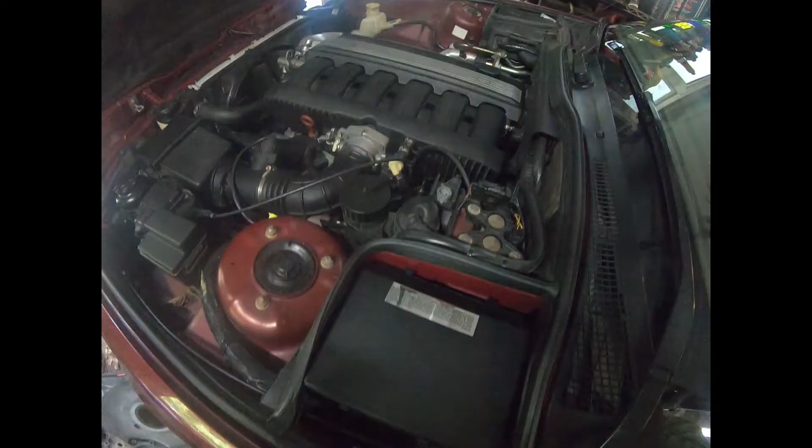All right, guys, we're out here at the E34 525i, and this water pump's been leaking for some time. And I just replaced the one in the other car the other day. That one wasn't even really leaking, and it just went kaplunk. So I thought I'd just take care of this one. So we're gonna start by just letting the fluid out of this guy.

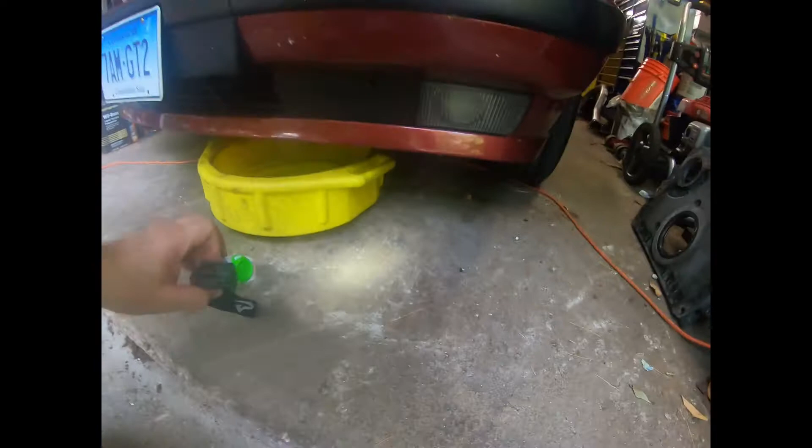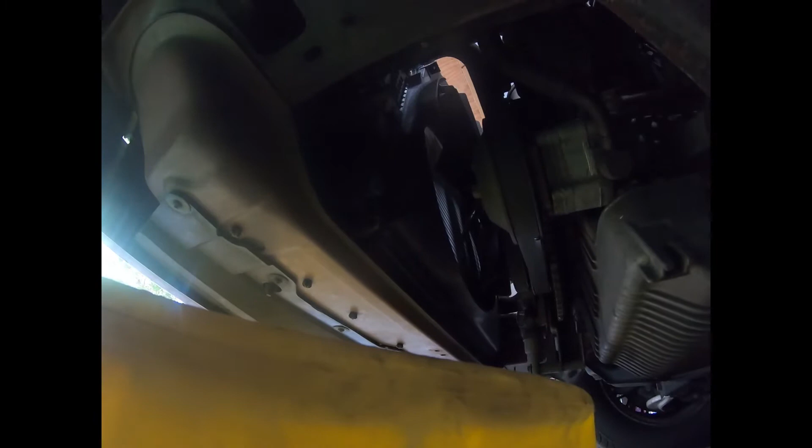And since we're replacing the water pump, we are going to replace the upper and lower radiator hose as well while we're here. I haven't done this in a while, so I think this just screws out as I remember. Oh, that's right. Now I remember. Okay, I'm gonna loosen the radiator hose now. So I remember now, because it never drips out of here. It goes all over the place. It's a mess.

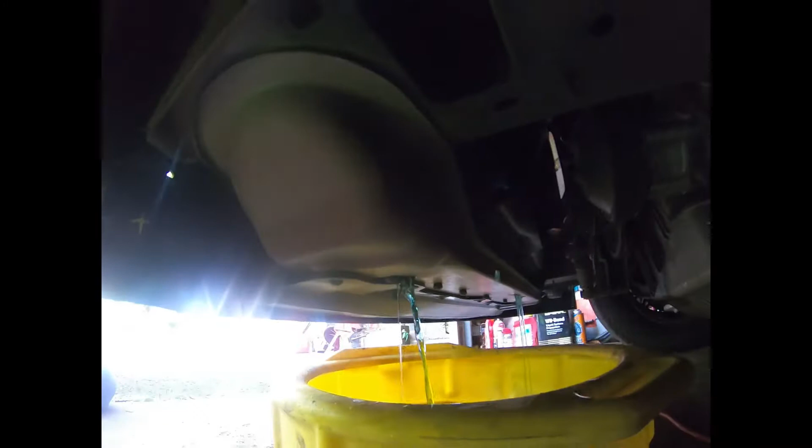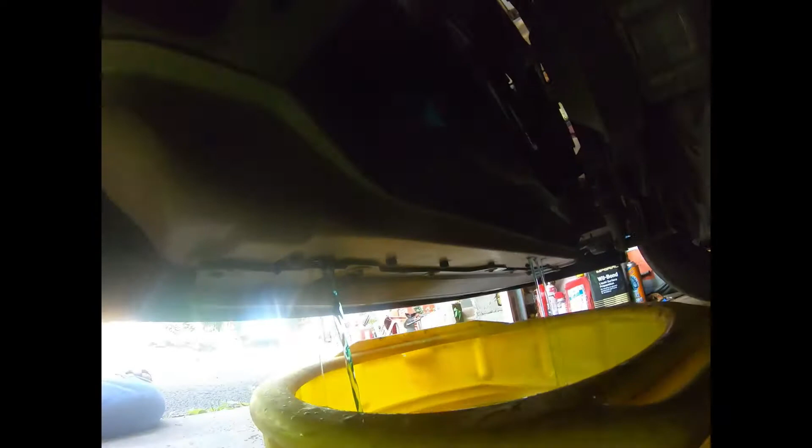Alright, so this is kind of how this goes. I remember this. I was not a fan of this. I don't know why they didn't just make that plug come out there, and then you could catch it in the pan. But we'll let this drip down, and then we'll go from there. Alright, so I just zip tie these guys on all the time. So we're just going to take these zip ties off.

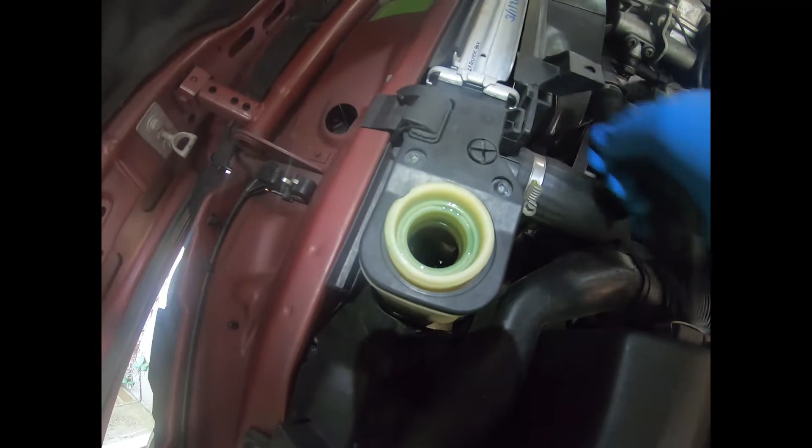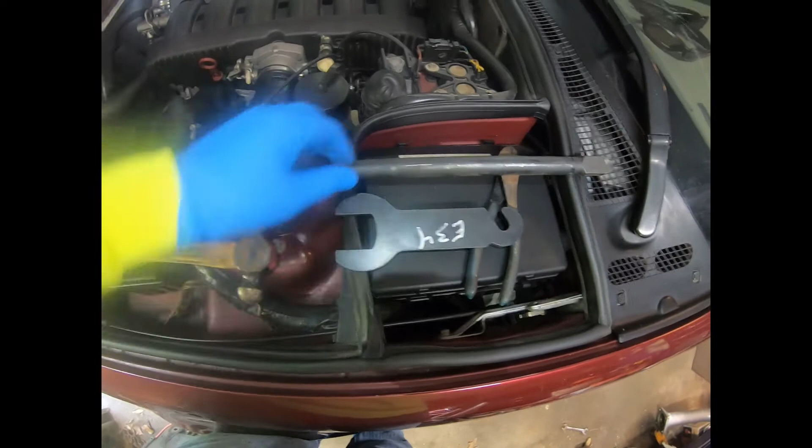And now we're going to loosen this guy and take the shroud and the fan off. So I have a set of these guys. It's got this wrench, and this is made to have an air hammer put on it. And then this guy just fits into here. There's different ones of these, and I just labeled this one E34, so I don't have to try to fit them. I just know which one goes where. So we're going to get this in here. This is reverse thread, so just pretend you're going to tighten it to take this guy off.

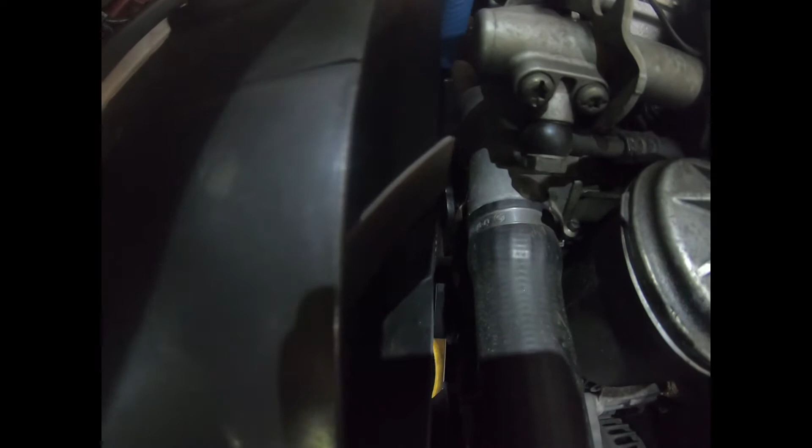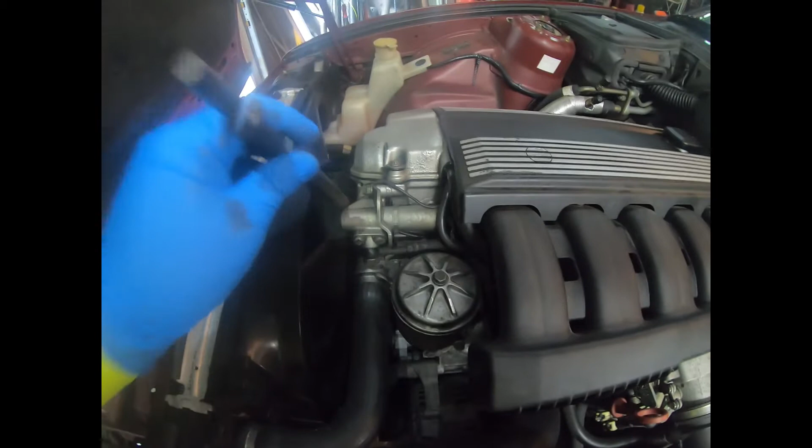So I usually just set this guy up in here the best I can, and then slide that on. And then I just hit this with a hammer. I never use an air hammer. That just seems a little excessive. Oh, except I set it up backwards. Whoops. Okay, let's try that again. So we need to go this way. Okay, so now, if it was regular thread, we'd be tightening it. So this is the way we want to go.

So then I just give this guy a tap. Usually that does it. And I'm probably going to drop my wrench in the bucket down there. Let's see if I can grab that. All right, and I try not to keep tools around here that I've used, just in case the hood shuts for some reason. I don't want to damage the hood, so I just put these aside. All right, now we just spin this guy off. You can see that it's loosening down there at the base. It's almost there. One more. All right, now we can just pull this guy out. So I just pulled this guy out and the shroud out at the same time.

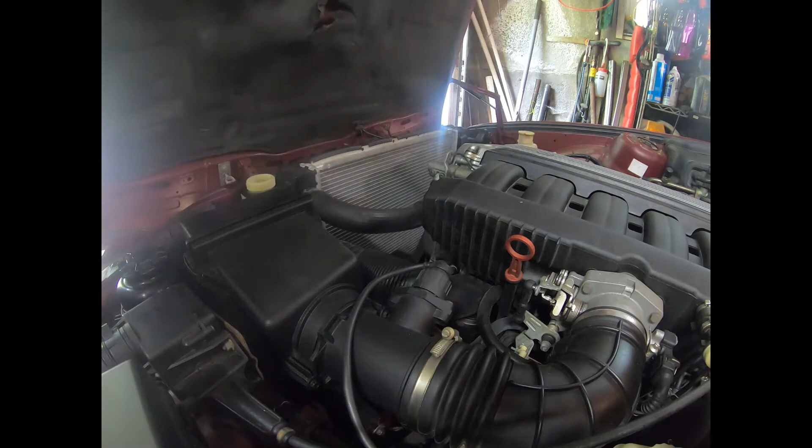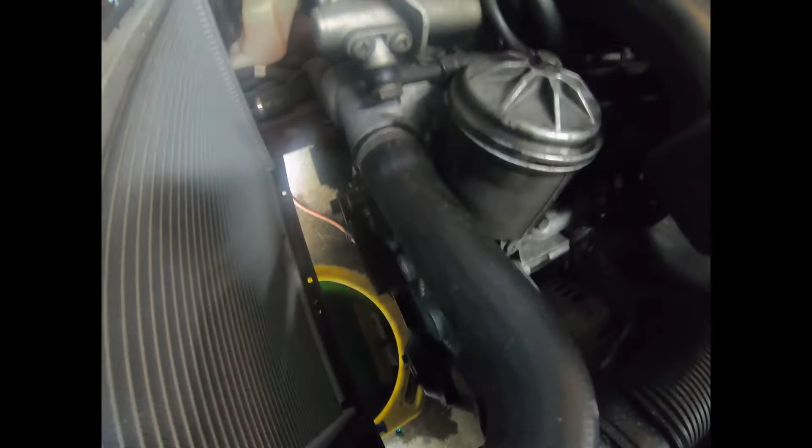So I was just looking at this, and this says I replaced the water pump in 2021 at 84,000. That's only 16,000 miles ago. But I definitely have a leak out here somewhere. I'm not sure where it is though, because I find it hard to believe that the water pump failed that quickly. So I'm definitely replacing these hoses. I'm going to take these off, and maybe they'll give us some room to look around.

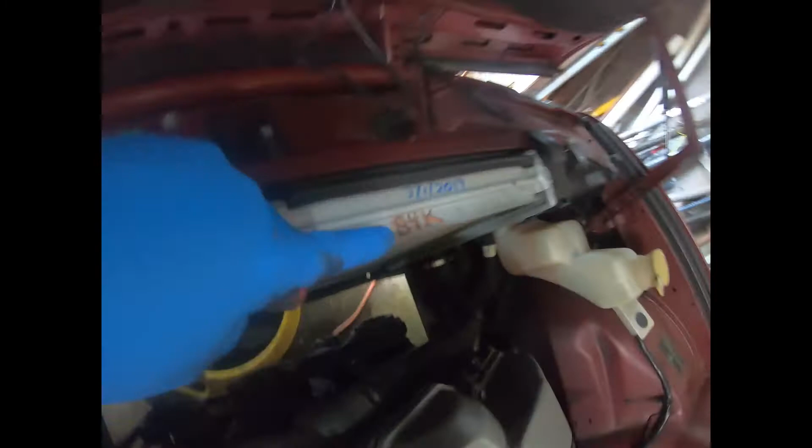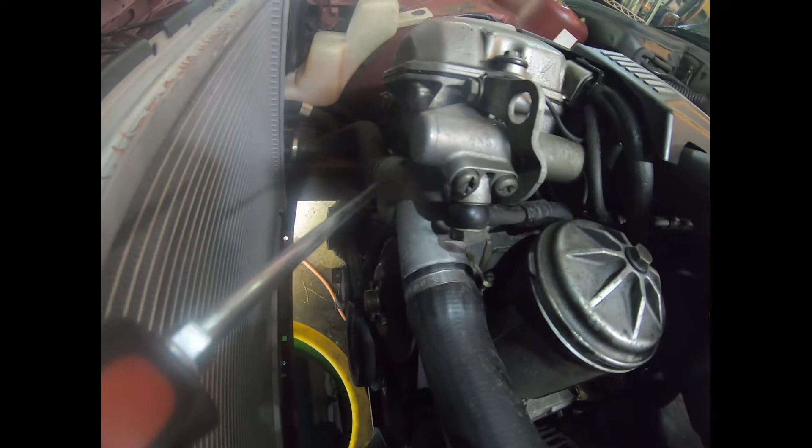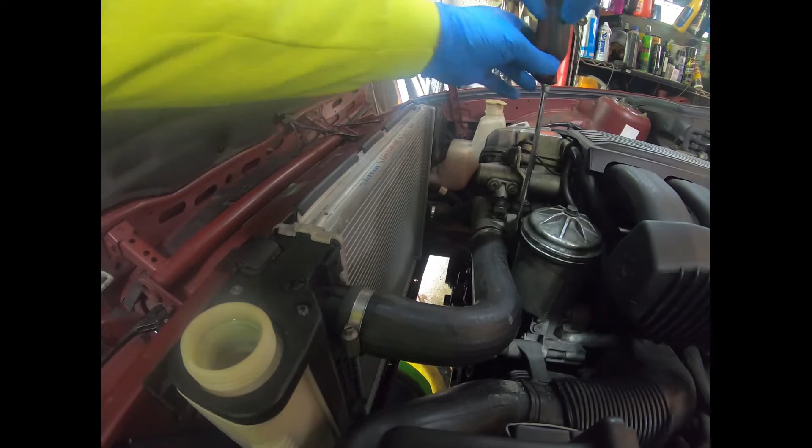I know it's only got 90,000 on it, so that's only 6,000 miles. So no, I definitely don't think it's the water pump, but it might be. I'm thinking it might be the gasket on the housing for the thermostat right here. So anyways, I'm gonna get these hoses off because we're going to replace these anyways, and then we'll see what we can see from there. It should be pretty empty in here, I think. Yeah. This one's a little crankier than that one was. Here we go.

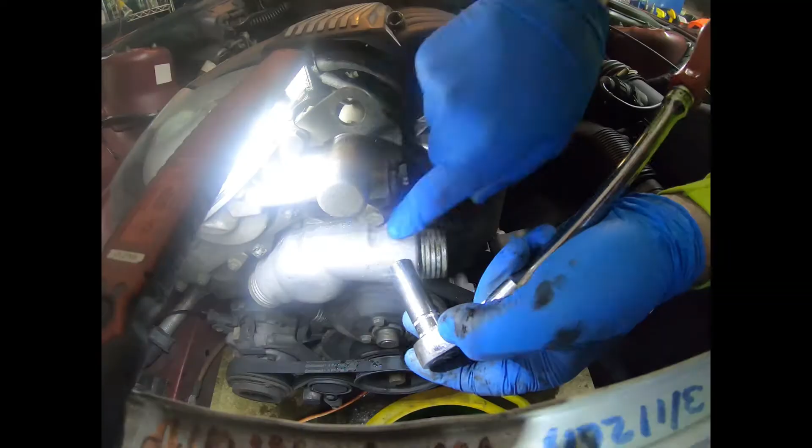Still don't see. Oh, I can see some residue. See, there's residue right there. So is that leaking from up here and coming down, or is that squirting out of there? I think we're just gonna go ahead and take this thermostat housing off. I bought another one. This one looks fine, but we'll just replace that and have a new gasket and stuff. We'll just go from there. All right, so we just have this guy right here. I think there's four bolts.

All right, so I went for the low-lying fruit first. Those are the easy ones. Oh, this one's really accessible here too.

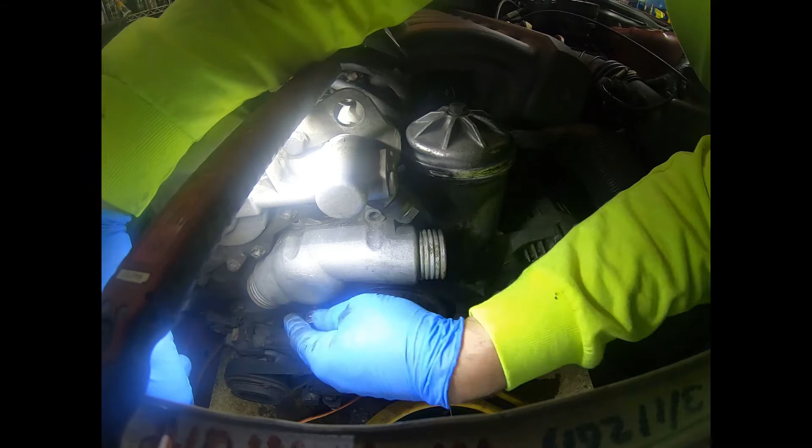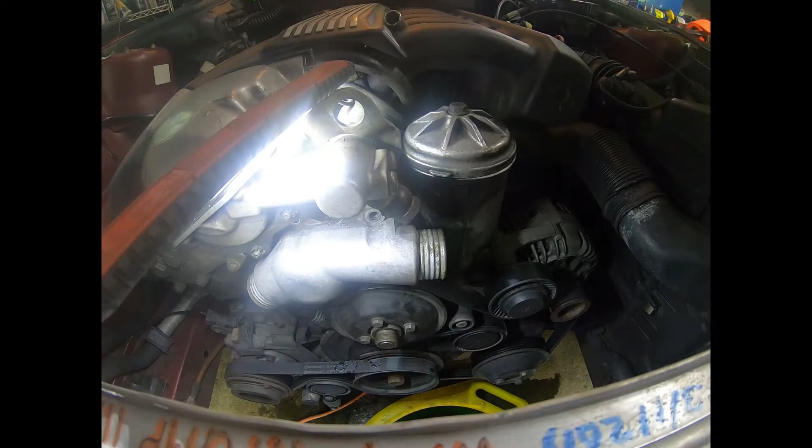Yeah, this has been a long process, because I had a fairly new radiator in it and it was leaking, so I replaced the radiator. The water pump wasn't that old at that time, and then it was still leaking, and sometime later I replaced the water pump on it, and it was still leaking. So here we are at the thermostat housing. If this isn't it, I don't know what's going on.

So I did have, obviously, the valve cover gasket leaking. That's why the front of this is such a mess, but I replaced all the lifters in this. It doesn't look like fresh oil, so hopefully that's been taken care of.

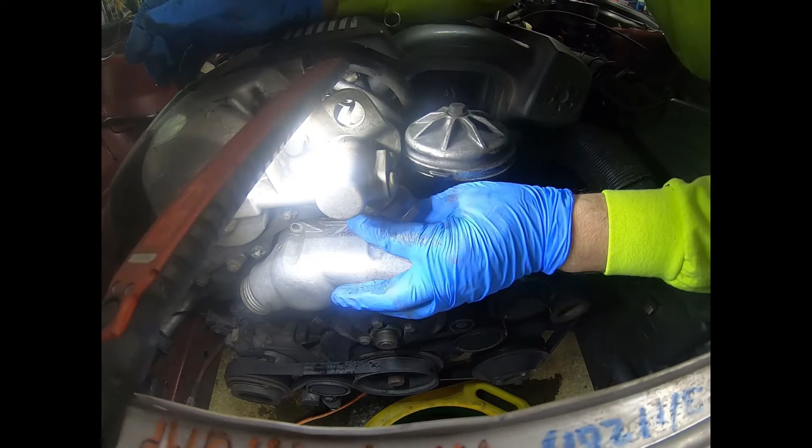Alright, maybe this will just pop right off. I may have to give it a little tap. Oh, it comes right off. Oh, whoops, I need to take this bracket off. Alright, I'll get this lift bracket off, which I'm not crazy about because it holds the Vanos on. I don't want it to start leaking from the Vanos gasket.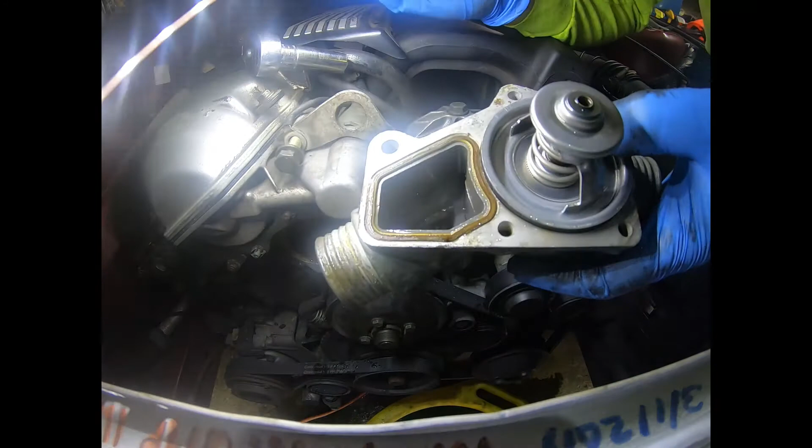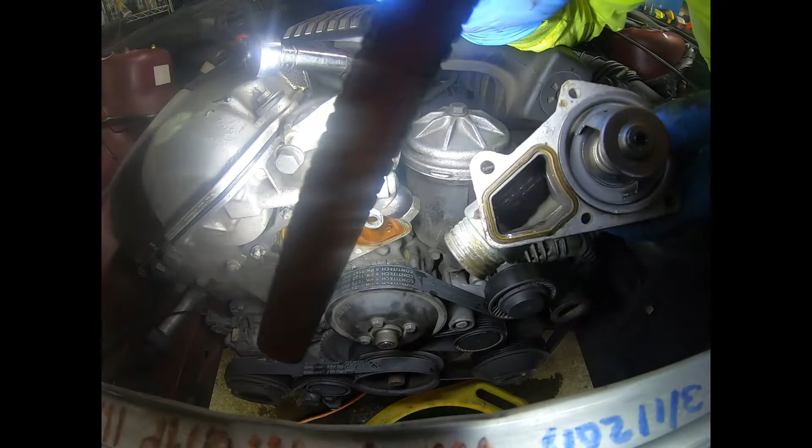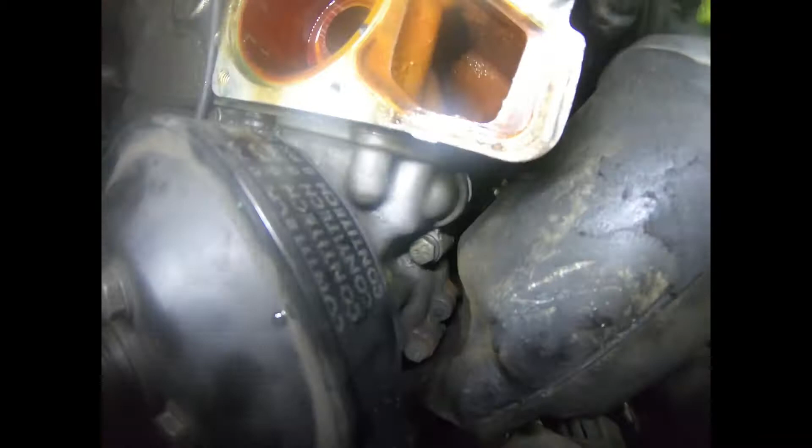All right. Well, there's the gasket. It doesn't look like the healthiest gasket. Yeah, I'm gonna guess that's where it was leaking from. Let's get a closer look in here. It wouldn't surprise me if it was leaking, especially right down here, or even down in the bottom right here. I'm gonna go with, yeah, that was leaking.

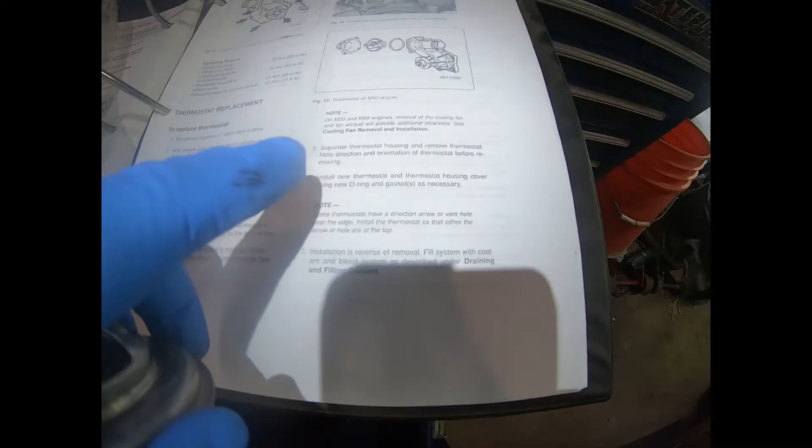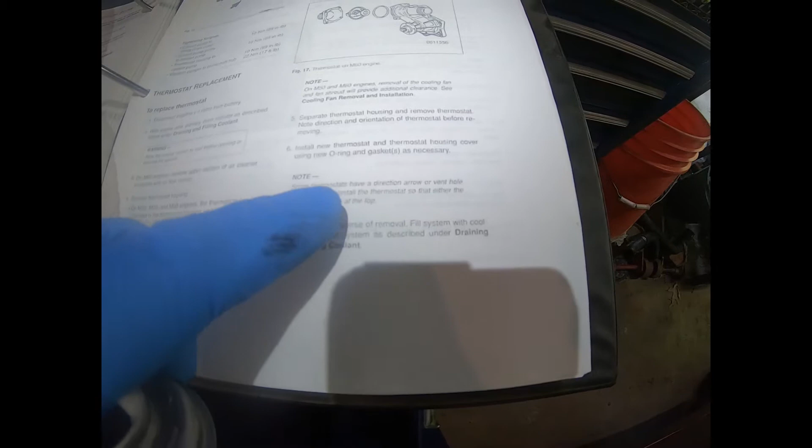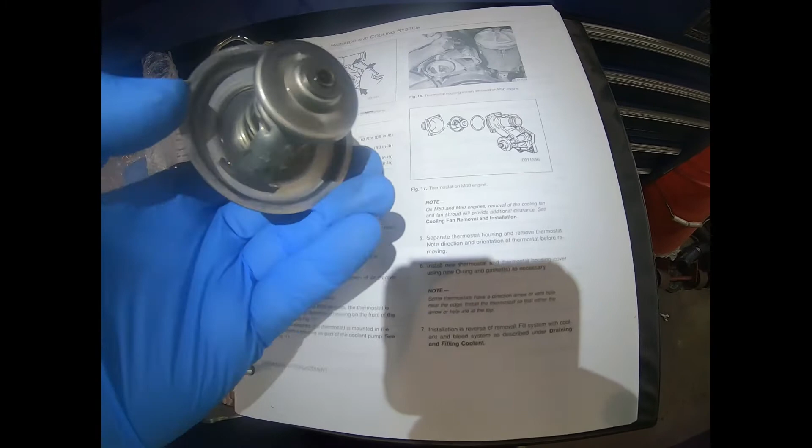Which I didn't realize, but it says some thermostats have a directional arrow or vent hole near the edge. Install the thermostat so that either the arrow or the hole is at the top. I don't see that on this one, so we're just going to orient it like it is in this picture right here, because I didn't take note of it when I took it apart. So we're just going to put it in like that.

Some thermostats have a directional arrow or vent hole near the edge. I don't see a vent hole or directional arrow. So yeah, we're going to put this in like this with the gasket on the outside.

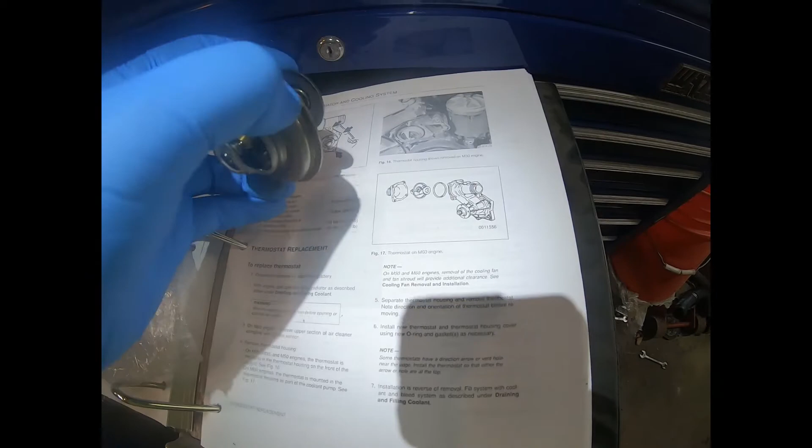All right, well, I had a new thermostat on hand. Here's the new one. Here's the old one. And I don't know why, but I don't like the way this one looks. And this one looks like a way sturdier design. Even though this is new, I think I might put the old one back in. That might be a poor choice, but I think that's where I'm at.

All right, so I'm just gonna take one of these pads and clean this up in here. All right, so the Scotch-Brite pad wasn't tough enough, so I had to go in there with a razor, and then I went back and cleaned up again with a Scotch-Brite pad.

So we're gonna put this in like this, so that the gasket's on the outside, like it seems like it should be. There's a nice little pocket for the... Oh, you gotta be kidding me. Oh, that was almost really bad. I almost just dropped this whole thing in there. This is my favorite light. All right, let's try that again.

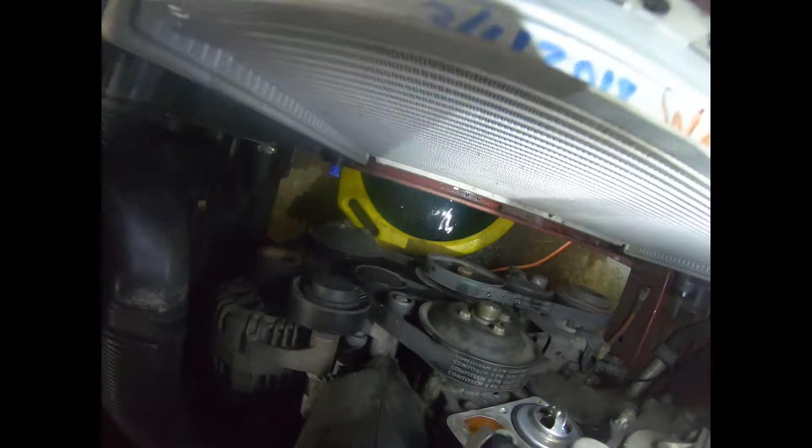All right, so back here. So now, yeah, this has a nice little pocket to fit in here. And so I'm gonna orient this up like this. There wasn't any vent hole or arrow like they said, so I'm just going with that. It goes like that. And then we've got, where did I put that? Oh yeah.

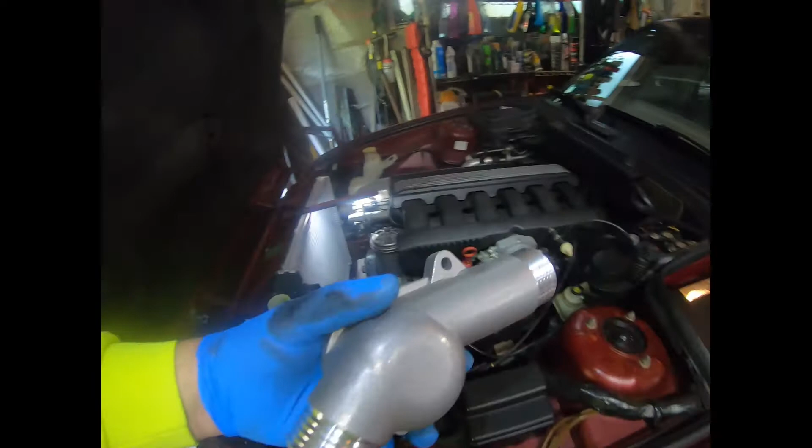Got our new thermostat housing that will pop up there. This is pretty self-explanatory after this, I think. So apparently not. I just tried to put it on upside down. So yeah, we'll just pop this up here. Ooh, I almost dropped the thermostat. I always try to be real careful with the thermostat because it seems like a pretty important piece. You don't want to mess it up.

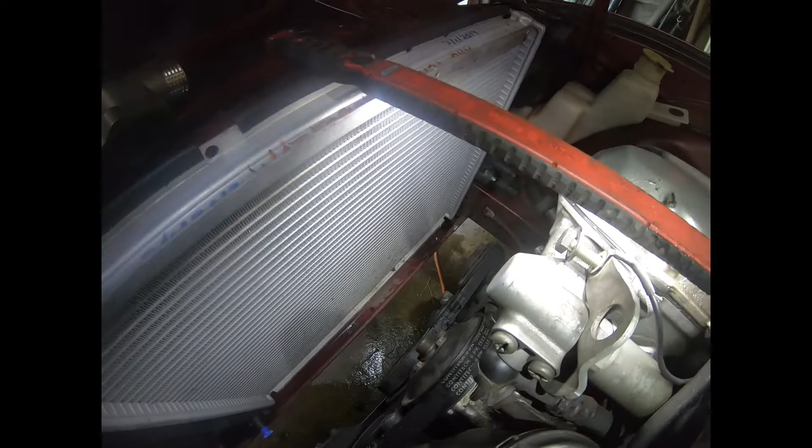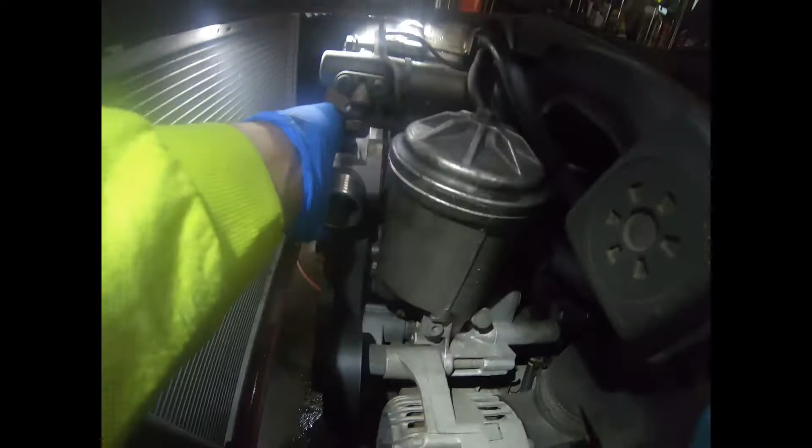When we put this in, we need to make sure we get it behind the lifting bracket. So that's kind of why I dropped the thermostat. So I'm gonna just put this guy right here. What's going on here? I lost my light again. All right, good thing I moved that pan. All right, we're just gonna take the lifting bracket out for a second, and it'll be easier to get this up here.

All right. We'll get one of the small ones in and put the lifting bracket back in. Let's get started right here. Wow, that's really hard to do without a socket. Okay, we'll try one of the bottom ones.

Okay, this is just sitting here. I'll go grab that socket. Okay, we'll just get this guy in. No, we got a socket we can get in there.

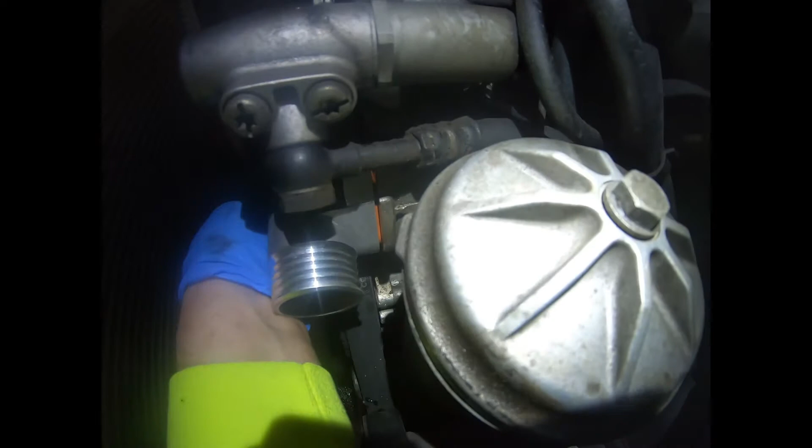So let's tighten these other ones up. Then we'll get the lifting bracket back in. So you can see, like over here, look at how that's gonna get a nice good seal in there. That gasket's got some room to compress. So get this tightened back up. Get this last guy tightened up in there.

Yeah, I always wear a headlamp when I do stuff like this. So then the light always points in the right direction. And I obviously use another light too.

I always mix this up. Now which one? I always mix up which is the short one and the long one. So, why didn't I pay attention to that? The lifting bracket has a short bolt and a long bolt, and I always mix up which one goes where. It makes me crazy every time I forget.

How is that possible? Okay, I think the long one goes up top, I think. Let's make sure about that. Okay, I'm pretty sure the long one goes up top. Yeah, it's definitely the long one. Long one definitely goes up top.

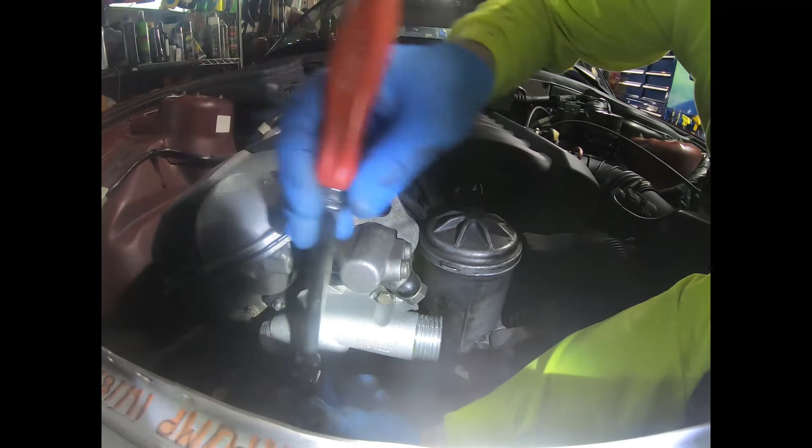All right, when I nudge these down, I want to do it a little at a time so that it gets nudged down evenly, so I can feel a little there, and then I'll move on to the next one. Then I'll just go back, so I can already feel some there. Lifting bracket.

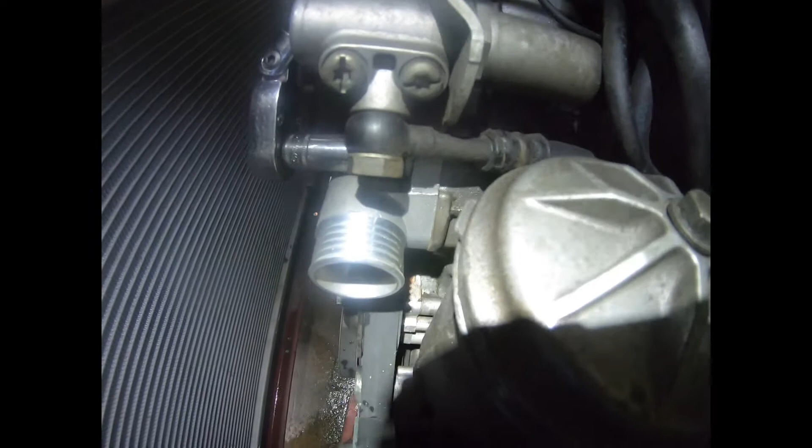Okay. So you can see that gasket we saw got sucked in, so it's making some good contact now. And we'll go around and nudge everything down a little more. Okay.

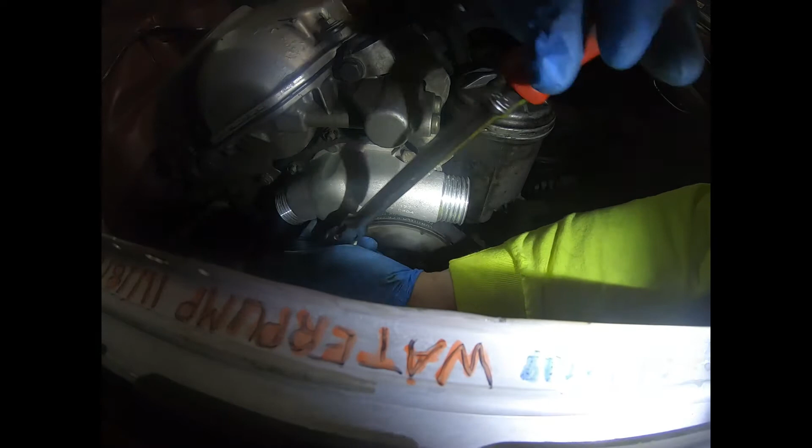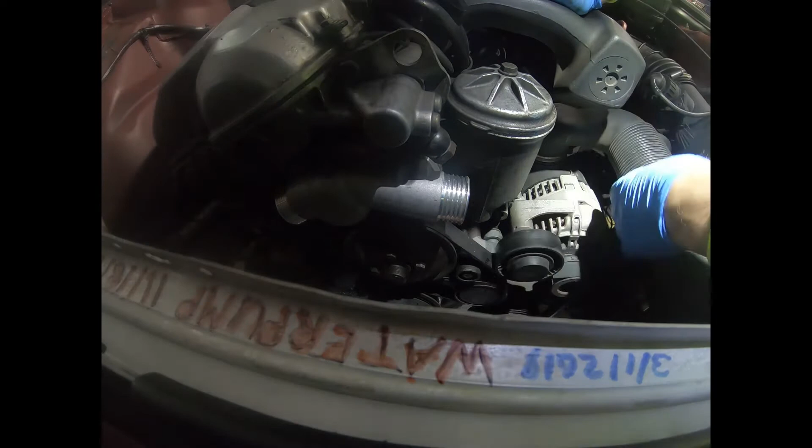All right, well, unfortunately I forgot. I just went and checked my parts that I had inside, and apparently I don't have the upper radiator hose, so I'm just gonna put the lower one in for now, put the old upper one back in, and I'll come back, partially drain the system and put this guy in.

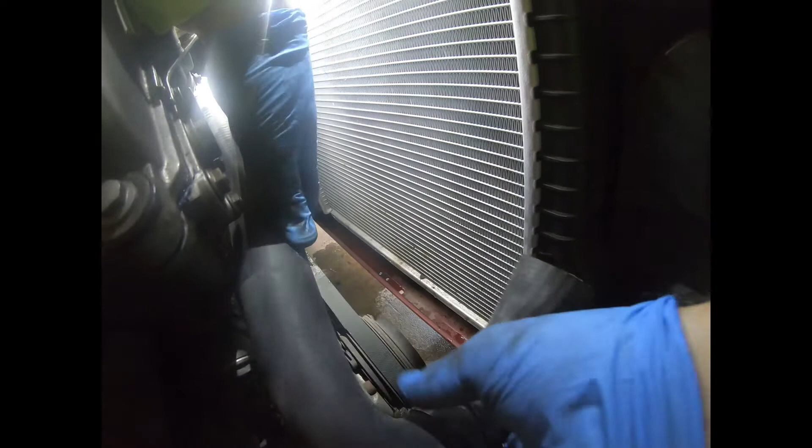All right, here we go. Just slide this guy on there, and when I take the hose clamps off, I try to just hold them in the same spot and then put them right back on the new hose, so then they're oriented, you know, where the screwdriver gets them. It's oriented in the right direction. You don't have to figure it out all over again.

All right, well, that was really cooperative. These hoses were thicker for some reason, so I had to really open up the clamps. And you don't have to kill these things either, just get them on there good.

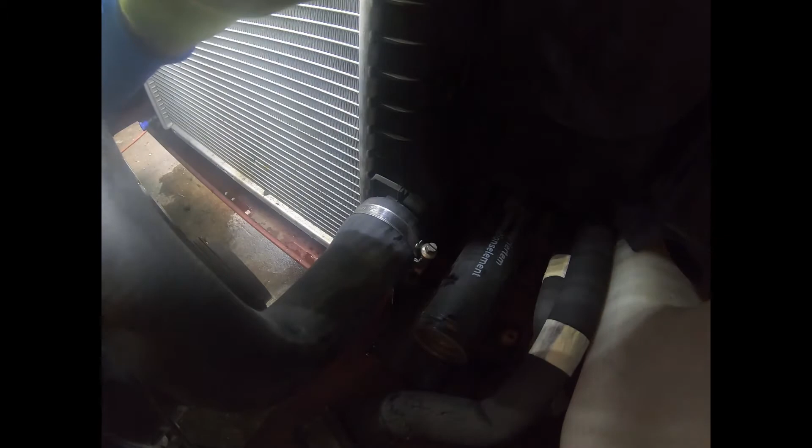So then I'm gonna try to, I think there's room on this top side with the fan and stuff, so I'm gonna orient this way, so next time if I have to take this apart, it's easy to take apart. Seems like it's sticking out, but I don't even think it's gonna be close.

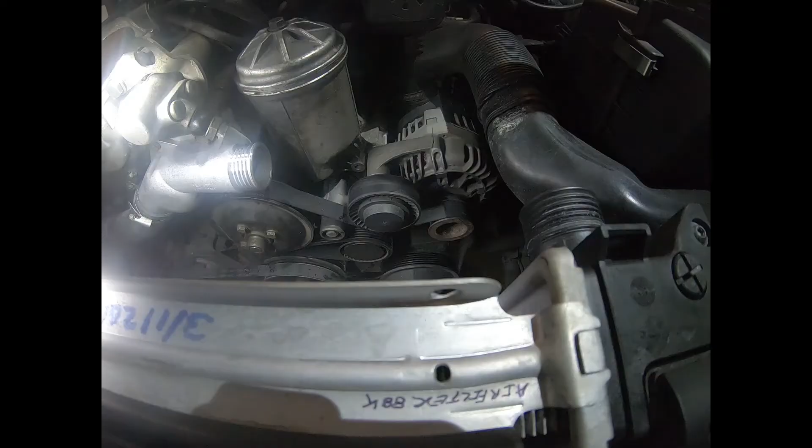All right, that feels good. So the same thing, I left these clamps on here so they're oriented in the right direction. I never took them off the hose.

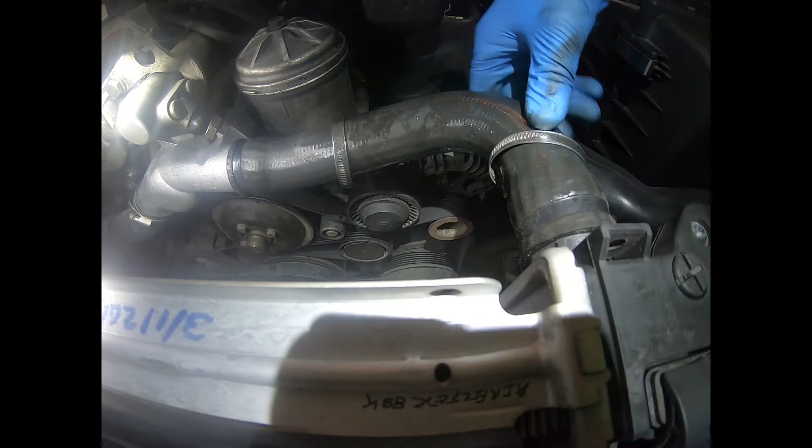So I already ordered a new hose. I like to have these around. And so I had to order a new set because I just did the water pump on the other car. And so then I just thought I'd do this one too, but obviously that wasn't a problem. So after I get them next week, then I'll replace this upper one again.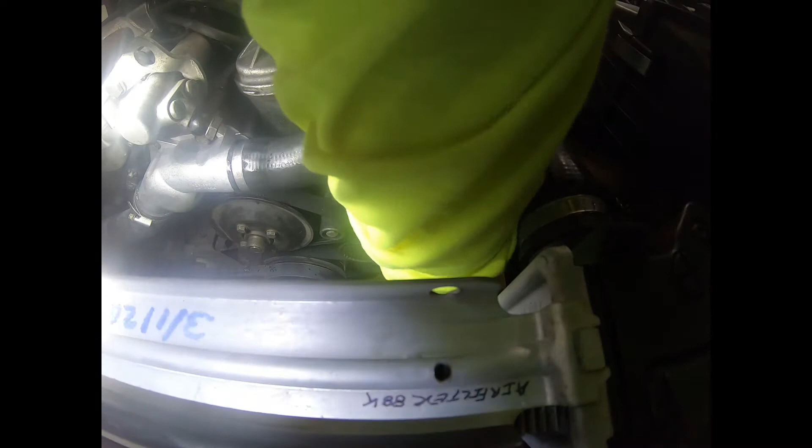All right, and so I need to close the valve down here, so I'm just going to reach down from the top instead of crawling underneath the car. All right, so it's looking good in here, and so now let's get the shroud in and the fan.

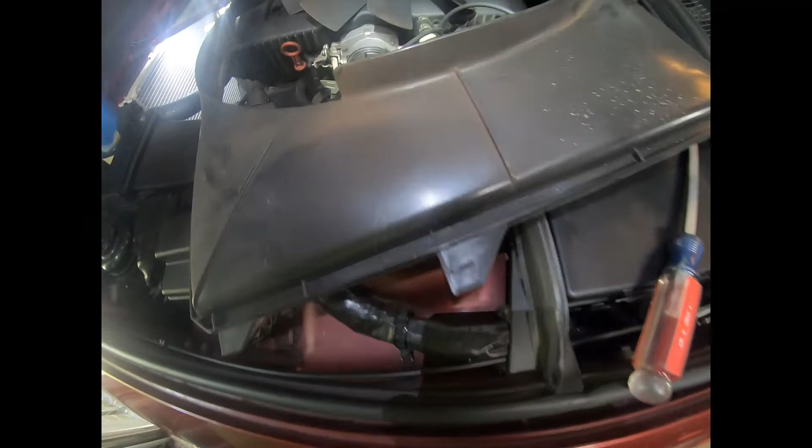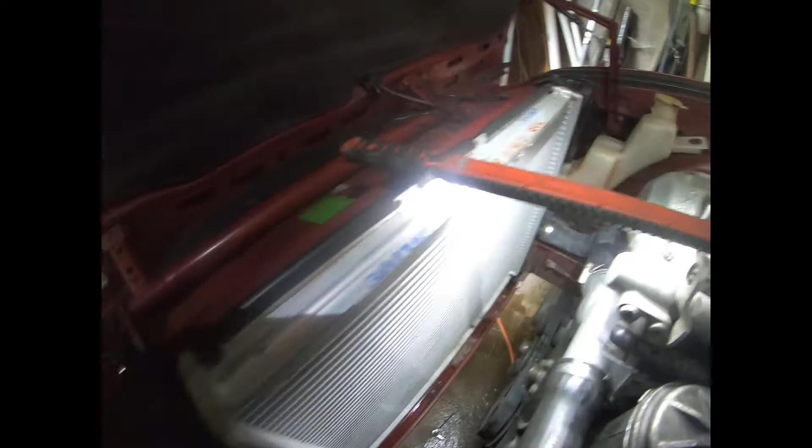All right, when you're putting this shroud back in, it's got these little tabs here on the side, and then there are little spots that those slide into. So there's one there and there's one down there. And it's the same on the other side. And sometimes there's one in the middle, but this radiator doesn't have that.

So I don't really know a trick to do this. So I just put this in here and go like this and do the best I can. So a big part of it is line up those tabs before you screw down the fan. So now everything's resting in place right here.

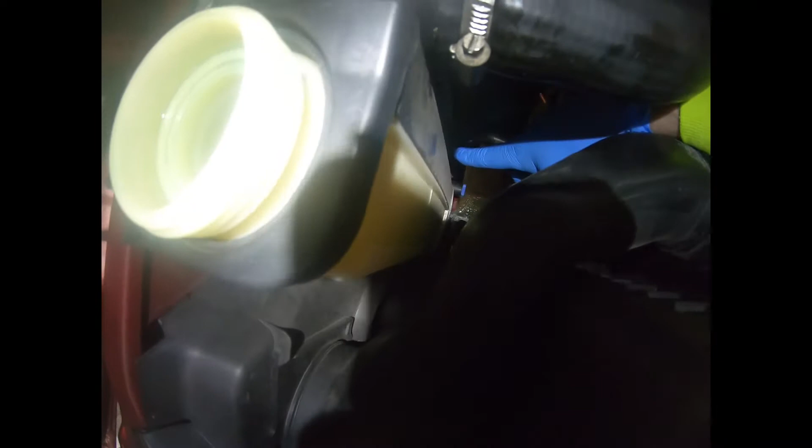So I don't know if you can see it down in there. Let's see if I can point the light there. So right where my finger is, this is slid into place right here. And so this guy is right here. And I don't even know if I can see the bottom myself, but the bottom's in, you'll have to take my word for it. And then we'll just check the other side.

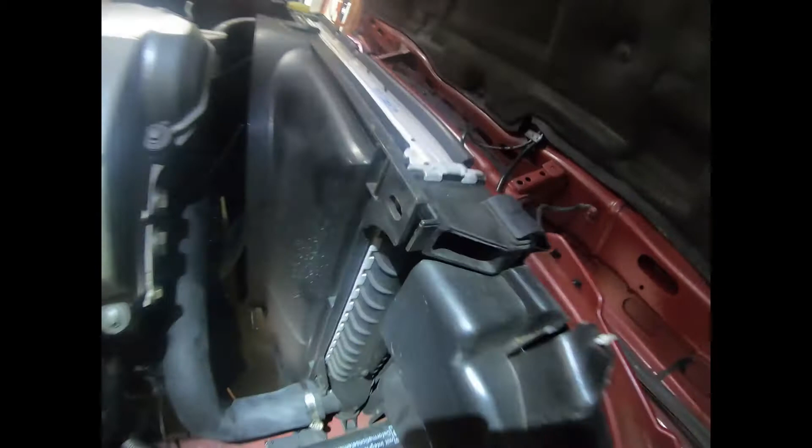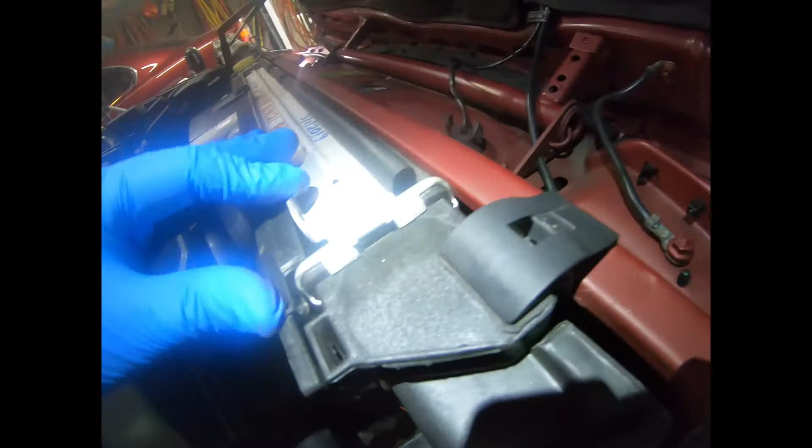Okay, so this one wasn't down in yet, so just need to nudge the whole thing up and then down, it looks like. Okay, see the bottom needs to go in. Okay, so now both these guys are in. And then there's one up top. This one looks like it's broken. And so that's looking good.

So now I'm gonna go back and check the other side again, make sure we didn't move anything. Okay, those are still in place. Just gonna have to take my word for it because it's hard to see.

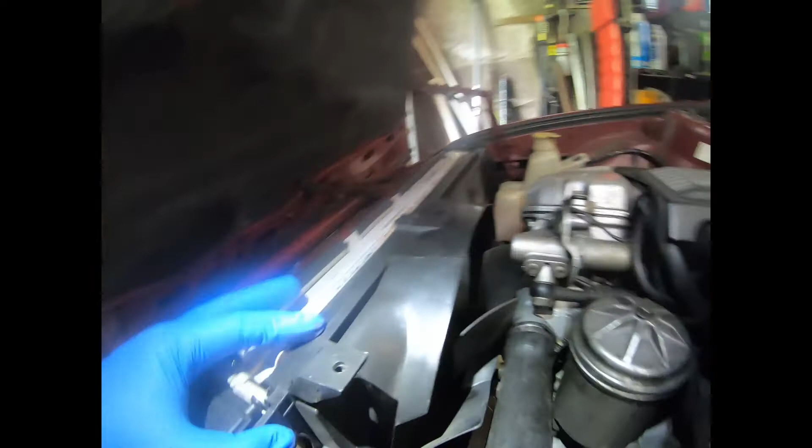And then getting this guy on there, getting that nut on there, you just have to struggle with it. I don't know if there's any trick to it. If someone knows the trick, please let me know, because every time I do this, I feel like it's a painful process. See if you guys can get a good view in there. I'll get a light in here for you.

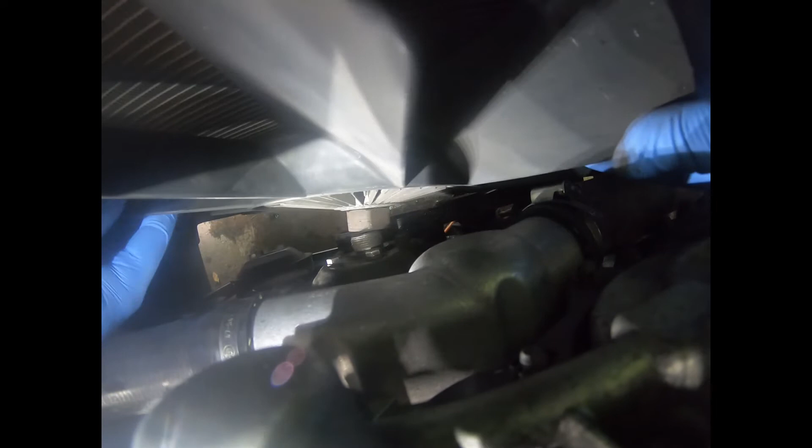Alright, so once again, you're going to go the opposite way you think. So we want to go backwards. Sometimes if I can't get it after a few times, I'll put the wrench on it and turn it with the wrench and hope that does it. Yeah, I feel like this isn't cooperating already, so I think we're going to have to do that. I'll go get the wrench.

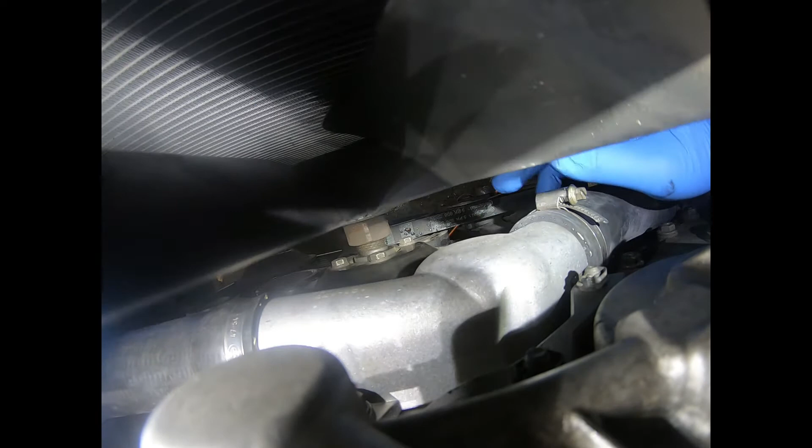So we want to turn it like we're trying to take it off. We just need one thread to catch and then it'll just spin on. I mean, they make long wrenches to fit in there, and that would probably make this job way easier. So I think the key is to get it square, and if you had a long wrench, I think you really could just get it in there, get it square, give it a turn, and it would probably go right on.

Oh, I think I just felt it notch into place on the thread. Could be wrong. If I can just catch it just right. Yep, there it goes.

Alright, so now it's down, and then we're just going to do the opposite. I'm going to just put this guy on here and give it a tap with a hammer, like when we took it off. So let's see if I can... it's not the best placing of that, so let's just give this a little turn. Do it from the other side.

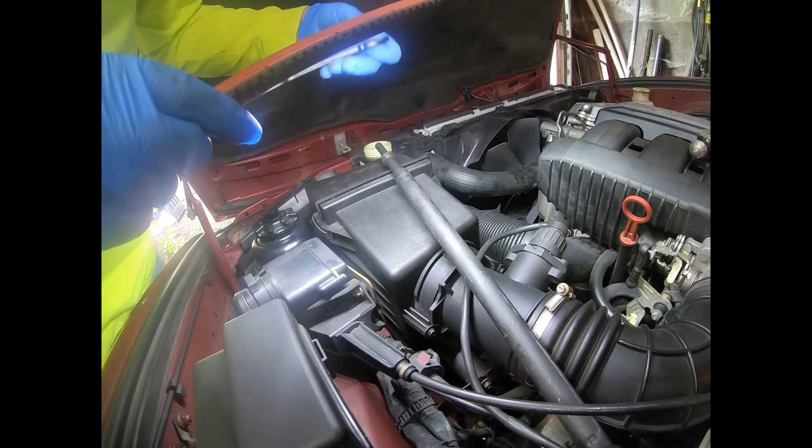We're gonna just give this a little tap. That's it. So basically, you don't have to kill that thing on there, because when you're running the motor and it's torquing, it's trying to tighten the thing every time you step on the gas, really. So yeah, that's not a real big deal.

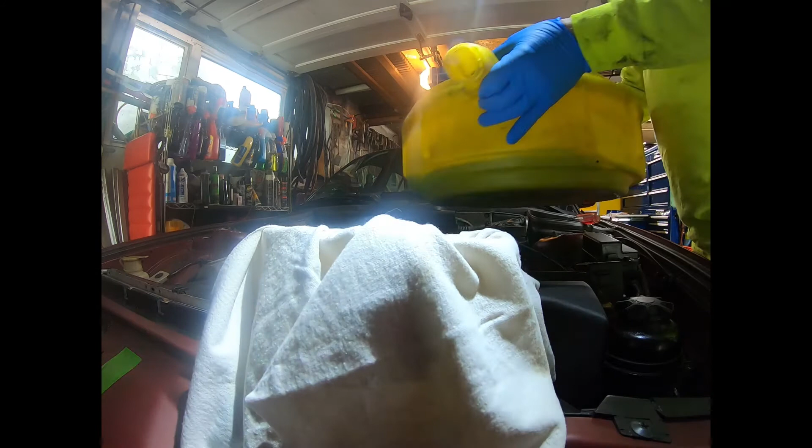All right, well, let's get some fluid in this thing and we'll bleed the system. So I'm just gonna pour the same fluid back in here. I just took a funnel and an old t-shirt that I cut part of it off. I cleaned this catch pan out before I drained anything in here. So I'm gonna just put this back in, because according to when I changed the water pump, this fluid isn't that old.

I'm just shaking the car with my leg so I can see the fluid line. I'll show you the fluid line in a second if you're not familiar with that. Let's just get this in here first. Probably gonna have some leftover until we start the motor up. And I like using this big chunky screwdriver for this bleed screw. It just seems to work really well.

So I usually go way too far. You don't have to go this far up, but I just like doing that. But then you risk it falling out and losing it or something. All right, we weren't so lucky. Here, let's just start it. Actually, I think it might go up if we start it. I can't remember. All right, I'm gonna just put this on. We're gonna spill a little.

And I forgot the keys, so I gotta go get the keys. All right, you can see the fluid levels right here. When I shake it, you can see it wiggle around. I'm gonna try to leave a light here while I start it.